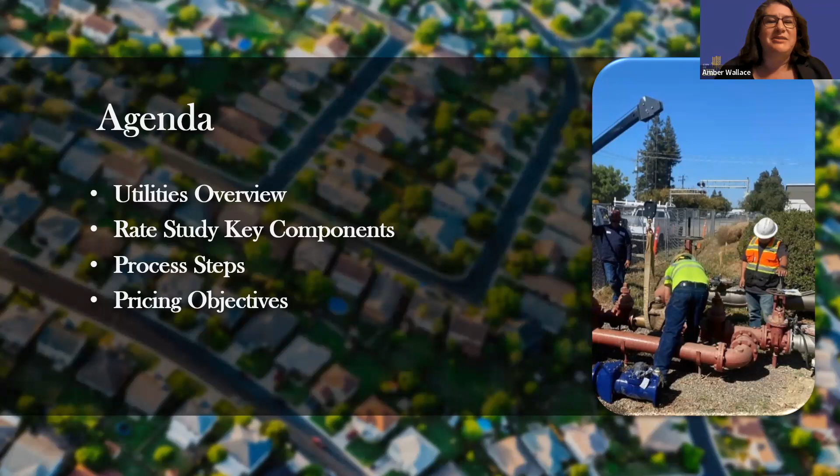So now for the main event, I'd like to introduce Amber Wallace, our senior civil engineer in the Capital Projects Department, to start off with some really interesting information related to infrastructure projects for the city's utilities. Thank you, Roberta. I'm Amber Wallace. I'm with the City of West Sacramento, and I'm a senior civil engineer. Can we change the slide, please?

So I'm going to talk about the city's water and sewer systems. Let's start with the good stuff, the city's water system overview. The George Kristoff Water Treatment Plant produces 11 million gallons of fresh water per day, and you can see that in the background of my slide. There's also 7 storage tanks in the distribution center, 2 clear wells, 8 booster pumps, 188 miles of water main line, and over 16,000 water meters.

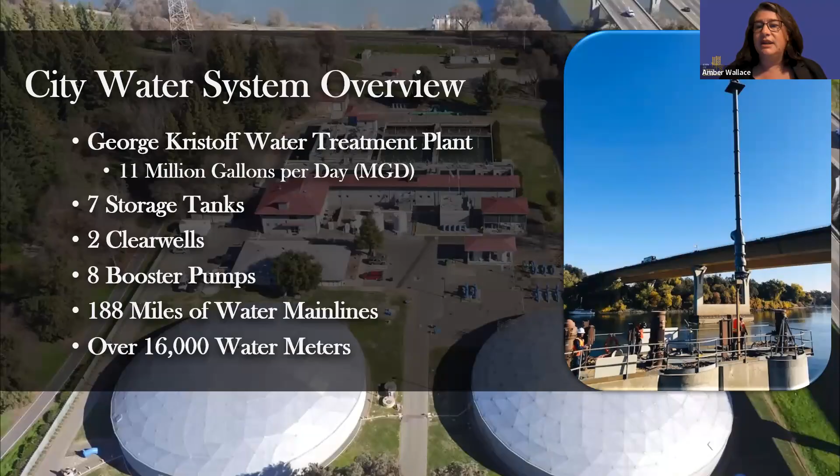Can we change the slide? Thank you. The city water has lots of challenges. One of the main challenges in the north area is aging infrastructure. I shared a picture of a giant geyser on this page, but usually when a water main breaks, it's not that big. It would just be a bubbling or a puddle on the ground. But this one happened on Southport with a large water main. There was a truck that actually hit a fire hydrant. So I thought that'd be fun to share.

Regulatory compliance updates for the state of California have shaped our challenges with the city water system. We needed to install water meters all over the city of West Sacramento. And now that we've installed them all, we now have to update them so that they're using the most latest and greatest technology.

And giving you the most accurate data on your water meter bill. Water rights and supplies is a really hot issue in California. There is not enough water and too many people who want it. So our staff have to work with regulators and with the surrounding agencies to make sure that the city of West Sacramento has the water supply and rights that we need now and into the future.

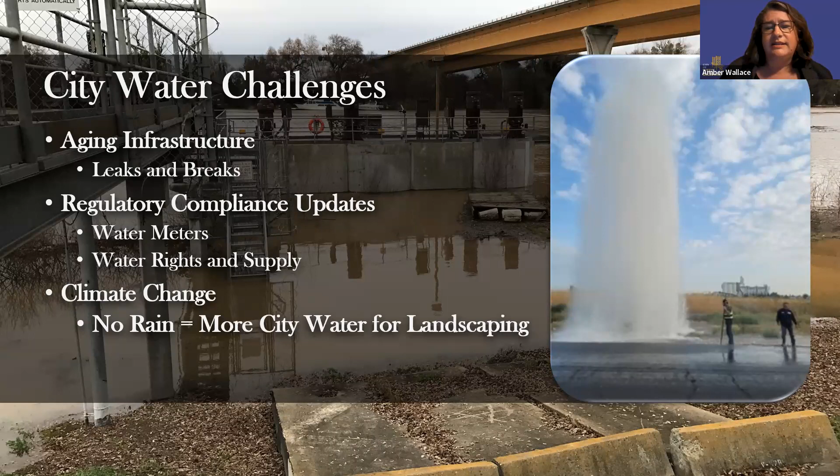Climate change also is causing troubles for our water system because when we have no rain or long periods of drought, there is more water needed for landscaping, and that causes issues as well.

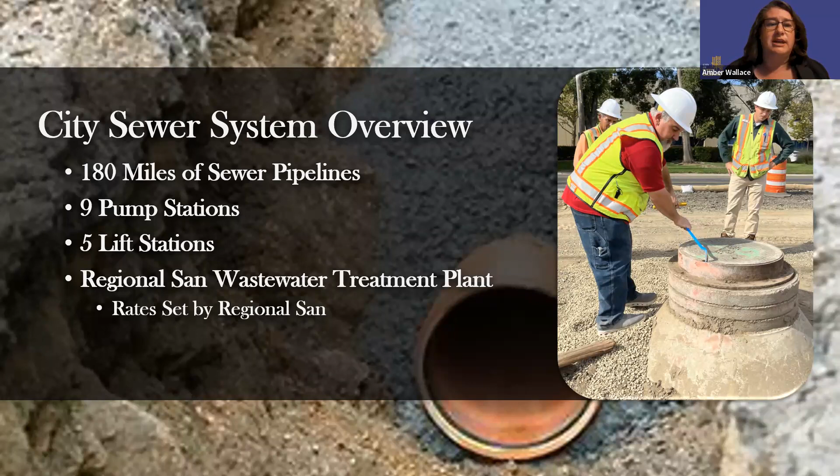For the city sewer system overview, we have 180 miles of sewer pipelines in the city, 9 pump stations, 5 lift stations, and all the sewage gets sent to Elk Grove to the Regional San Wastewater Treatment Plant. Regional San bills through our billing system, but they create their own rates, so that's a little bit different than what we're doing.

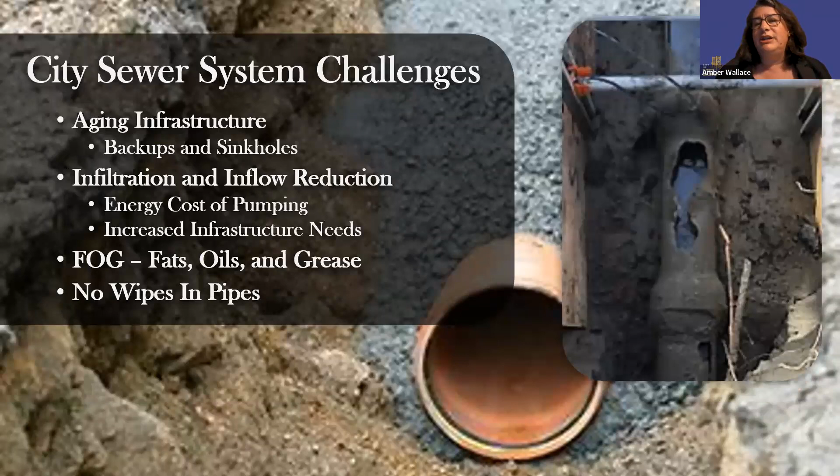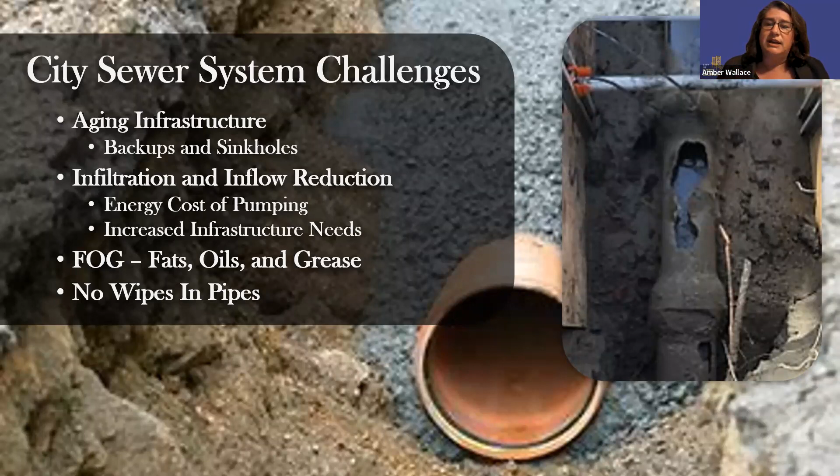So challenges by the sewer system are aging infrastructure, backups and sinkholes. Here's a picture of a pipe that has been corroded. A lot of times when a pipe is older, it will get old and corrode, and then water and soil will start seeping into our sewer system. That can cause the sewer to back up, and it can also cause a sinkhole.

All the fines come in and create a void underneath the ground. This one is like a small 1.5 foot void sinkhole we found in the State Streets neighborhood, and Public Works fixed that right away when we found it. But this is the kind of stuff that we're trying to avoid and look for before it happens and before it becomes an issue.

Infiltration and inflow reduction is another cause. It's when groundwater or rainwater gets into our sewer system, and it causes more pumping costs, more treatment costs, and particularly for the city of West Sacramento, the pumping cost is astronomical due to the energy rates. And then also it can cause increased infrastructure needs.

Particularly in the downstream portion of the sewer, like in the south area, we'll have so much flow going into pump stations that we'll think, do we need another pump station? Or should we fix all the pipes in the sewer service and try to find all these leaks and cracks? Because it can be very small, it doesn't have to be as big as I just showed you.

Another way that residents can help with maintaining the sewer and make sure that it's clean and clear, and that we're able to do our jobs as efficiently as possible, is to make sure you keep all fats, oils, and grease outside of your sinks. Those should be scraped and put in a can or in the garbage.

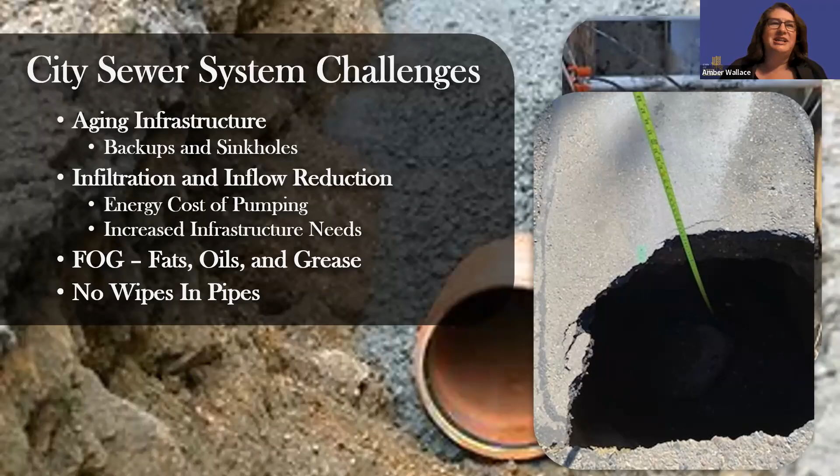Also, there's no wipes in pipes, which means those flushable wipes that we all have seen are not flushable. I don't know why they're called flushable, but that's a really big problem for us in the sewer industry. So don't flush any kind of wipes or anything rather than toilet paper.

So I have a list. I have a lot of pictures of completed infrastructure projects that we've done. And these were identified in the 2015 sewer and water master plans.

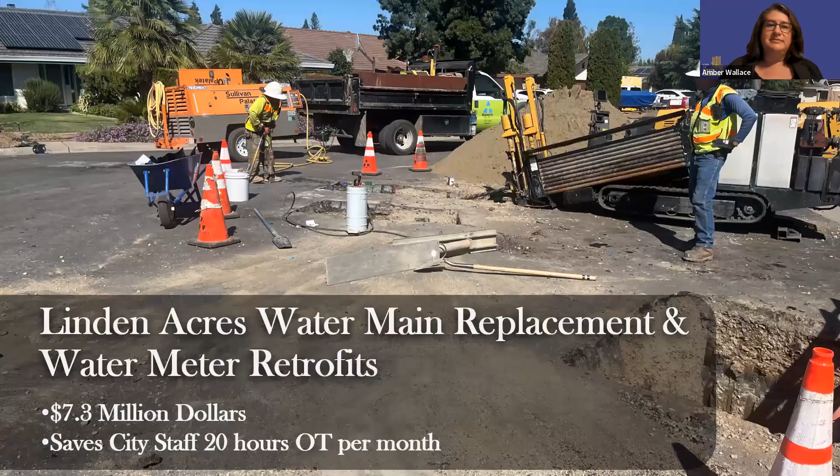Here's the first one that was just recently done. It's called Linden Acres Water Main Replacement and Water Meter Retrofits. In the Linden Acres neighborhood, they were having a lot of problems with water line breakage, and so our crews were out there all the time. This project that was recently completed has been saving the city staff 20 hours of overtime a month, which is very important to our small staff. The cost was $7.3 million, and that includes design, construction, and everything in between.

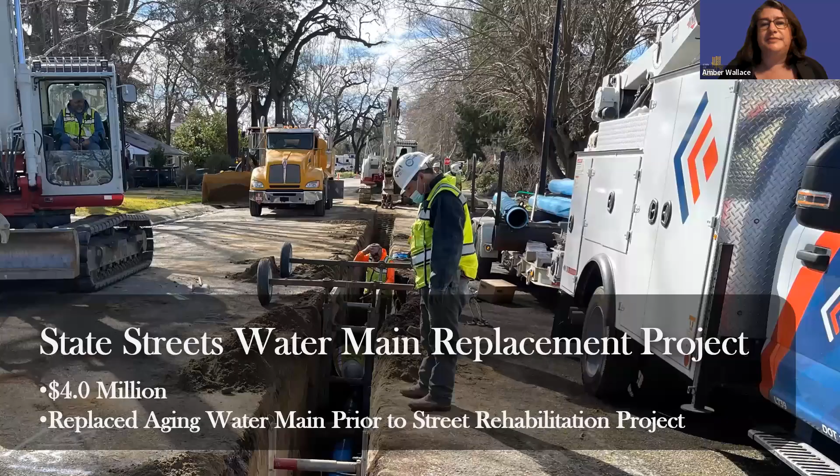Here's another recent project. It's the State Streets Water Main Replacement Project. This is a neighborhood where their infrastructure is at the end of its life. For $4 million, we replaced aging water main. We want to do that prior to doing the upcoming State Streets rehabilitation project for the pavement.

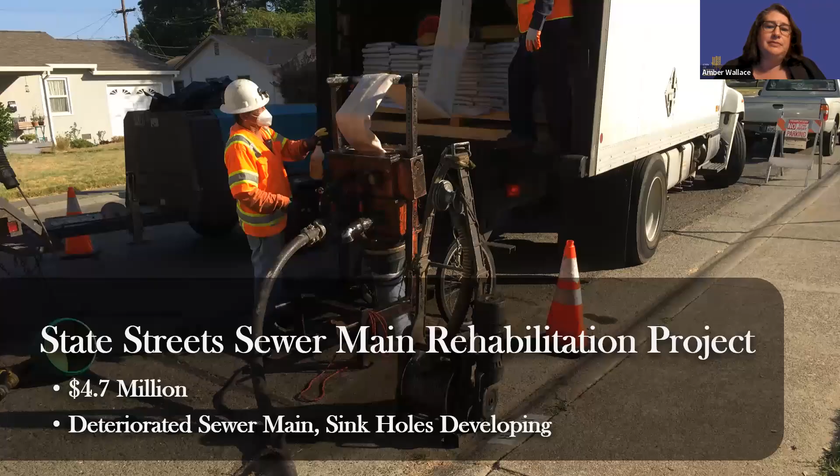We also did the sewer main rehabilitation project, at a cost of $4.7 million. We used a rehabilitation method called CIPP, cured in place pipe. You can see this cool picture of this felt liner being inserted into the sewer line. That felt liner is impregnated with resin and filled up with hot water or hot air and cured in place. It creates a structural pipe within the pipe, and it's a very inexpensive way to fill up all those holes, all the gaps, any kind of root intrusion, any kind of problems we've had with those sewers.

And we saw in our latest modeling effort that infiltration in this neighborhood has gone down significantly. So it was such a great story, a success story.

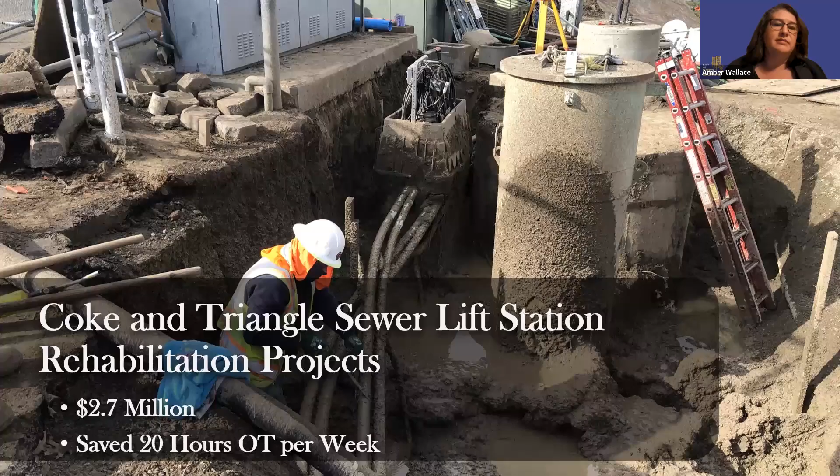Here's a project where we did Coke and Triangle sewer lift station rehabilitation projects. Remember, there are many lift stations and pump stations on both the sewer and water side, and a lot of them, especially in the north area, are pretty old. So we're going through doing rehabilitation. These two together cost about $2.7 million, and we saved 20 hours of overtime per week for our crews. So that's a success.

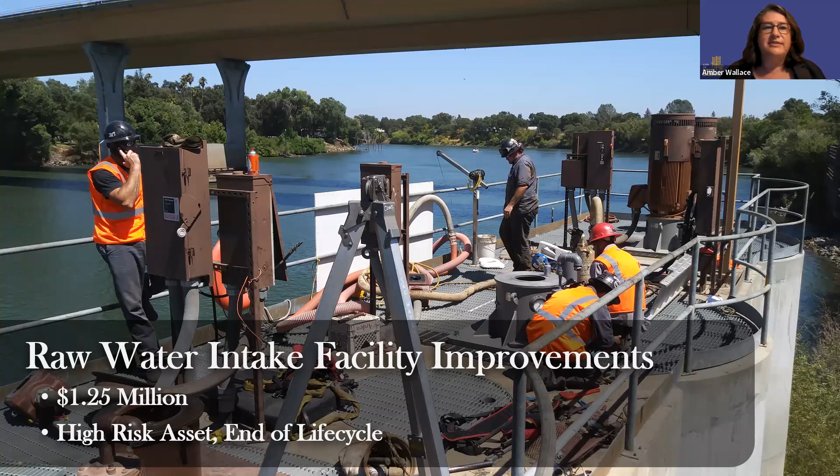Here's a project that happened at the George Christoph water treatment plant, a raw water intake facility improvement. It was $1.25 million, and this is a high-risk asset that was near the end of its life cycle. It's such an important asset that we have to make sure it's always working and never breaks down. So this was a very important project.

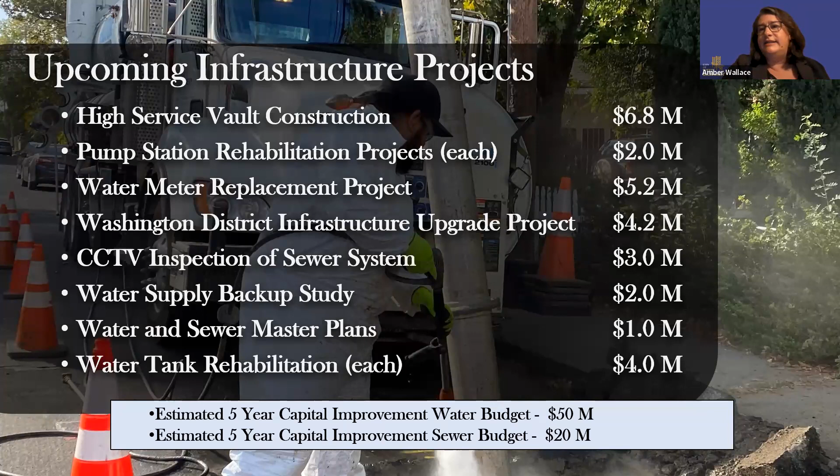The reason they're so different is the water budget includes the George Christoph water treatment plant, which is a very high-risk, very important asset. I'd say it's one of the most important assets in our city. So thank you so much.

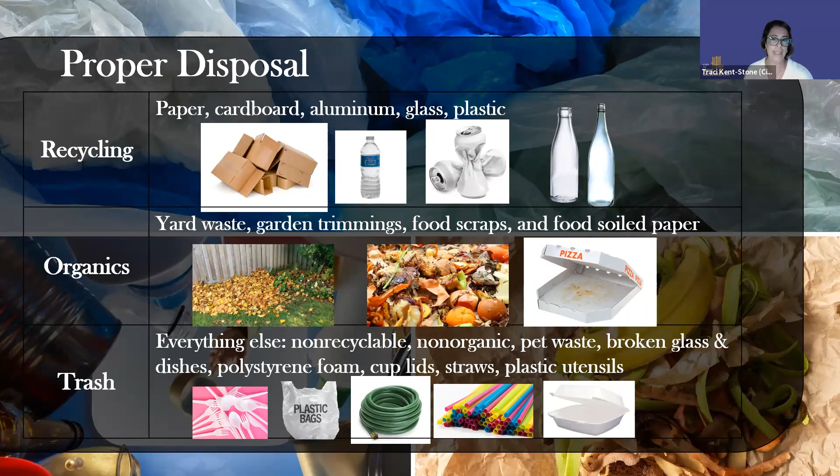If you have any questions about how to recycle, you can visit our website at westsacrecycles.org.

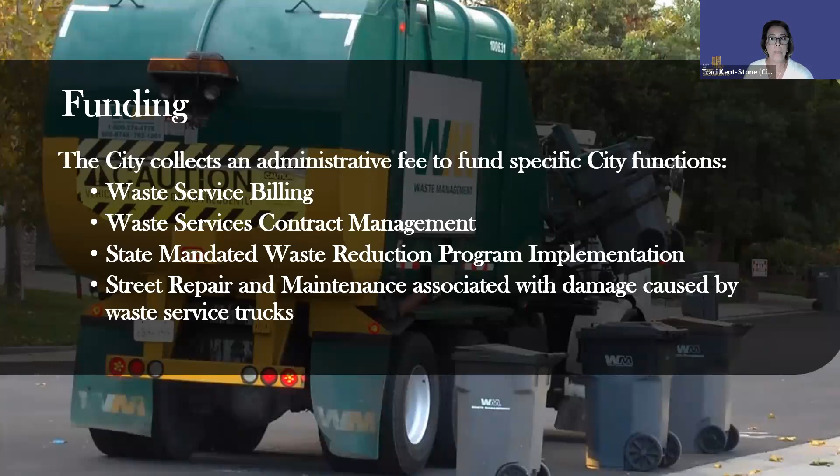In terms of funding, the city collects an administrative fee to fund city solid waste functions, such as utility billing, contract management, waste reduction programs mandated by the state—one example being SB 1383—and street repairs associated with damage caused by collection trucks.

SB 1383 was signed into law in 2016 with the goal of reducing greenhouse gas emissions caused by organic waste disposal in the landfill. It is a requirement for all residents and businesses with very few exceptions. SB 1383 mandates that jurisdictions provide organic waste collection and recycling service for all residents and businesses.

Again, organic waste includes yard waste, food waste, and food soiled paper. Jurisdictions are also required to ensure all bins are labeled with SB 1383 compliant labels to identify what goes in each cart. This is part of a comprehensive outreach requirement prescribed by SB 1383.

I bet you didn't know Californians send 11.2 billion pounds of food to landfills each year. SB 1383 requires jurisdictions in California to implement an edible food recovery program that will, one, feed hungry people, and two, reduce greenhouse gas emissions by keeping edible food out of the landfill.

Lastly, SB 1383 requires cities to purchase and use a specified quantity of recovered organic waste products to meet the law's annual procurement requirement.

SB 1383 has and will continue to change the landscape for the city's solid waste programs. For instance, the city is required by law to develop a compliance monitoring and enforcement program effective January 1 of 2024. This program will ensure all generators are compliant with SB 1383 provisions, and if they are not, enforcement action may occur. Additionally, SB 1383 requires all carts and bins to be color compliant by 2036 or sooner, depending on a jurisdiction's current supply of carts and bins.

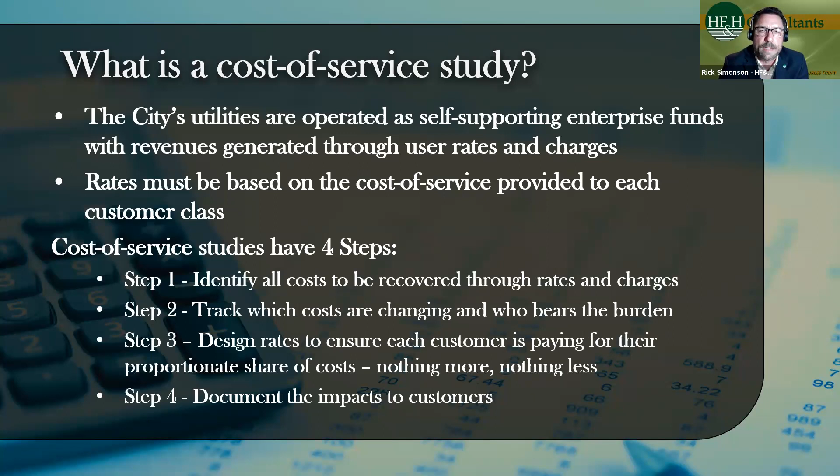Third, design the rates once we understand how much needs to come from residents and how much from businesses, to ensure each customer and customer class is paying for their proportionate share of costs, nothing more, nothing less. And lastly, documenting these impacts to customers: what are the expected increases over the next 5-year period for the average customer?

I'll start off with a brief overview of what we've done with the city over the last 6 months in the rate studies and where we are with refuse.

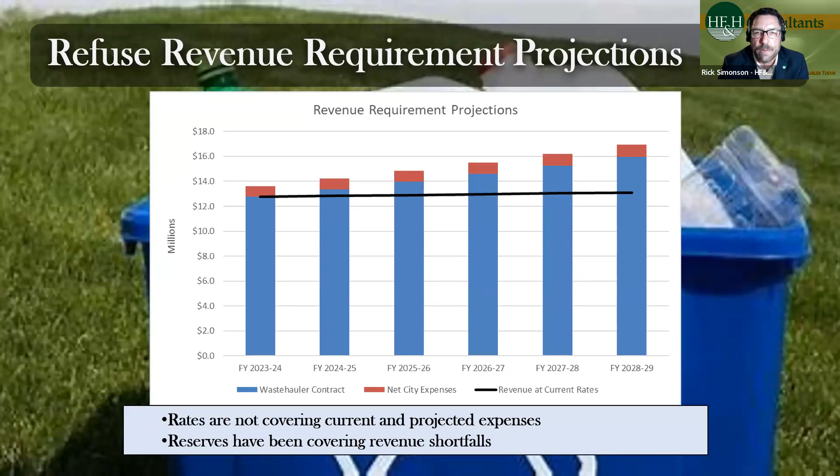A little more specifics about the key issues as we've moved through the process that will be affecting rates. We do know some sort of increase will be necessary over the next 5 years. Once again, we have not had an increase in refuse rates since July 1, 2021.

Though, as we all know, costs have been increasing. Consumer price index has been higher than pre-COVID days. So the current rates do not cover the current or projected expenses.

Waste management costs have increased 4% per year since July 1, 2021, and are projected to increase similarly over the next 5-year period. Another key factor is the disposal fees with the contract the city has with Yolo County Landfill. This past February, they increased 8.4%.

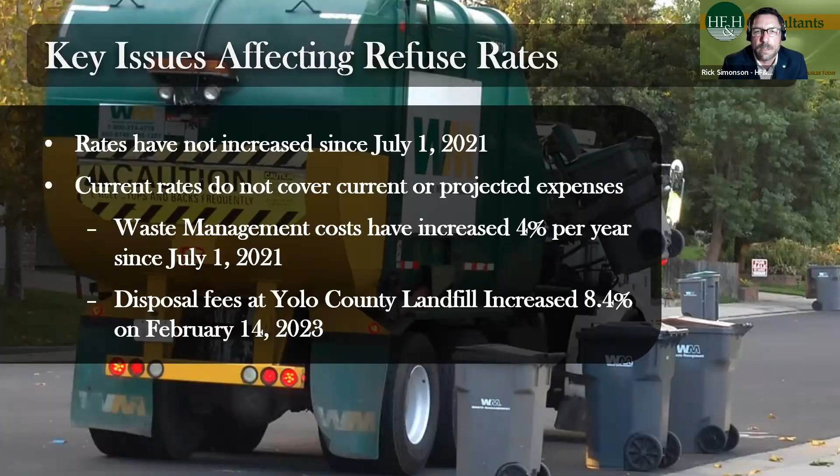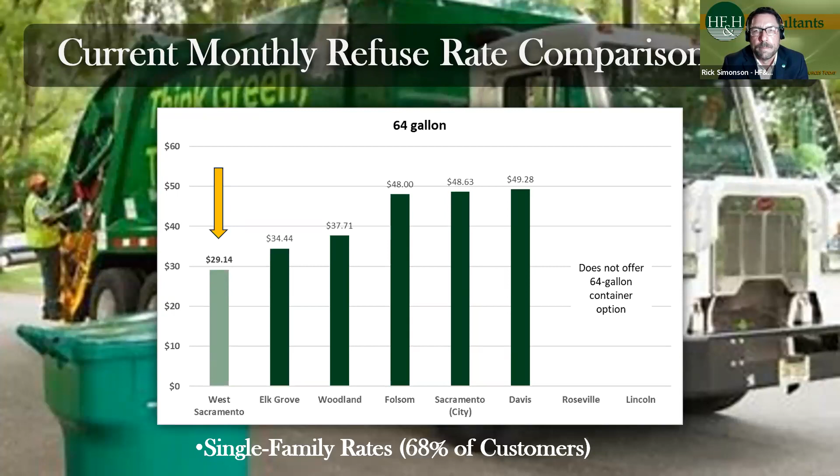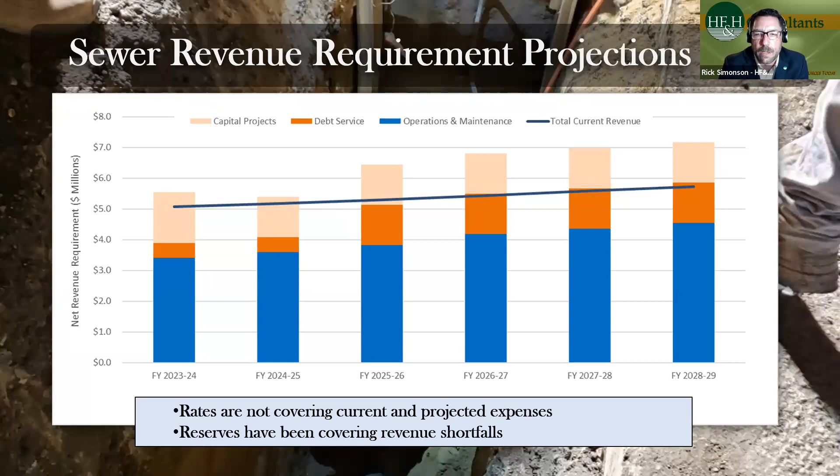Some key issues that are affecting the sewer rates as we've been working with the city on their financial plan over the next 5-year period. Again, the rates have not increased since July 1, 2021. And we know there's additional funding that will be needed for these major rehabilitation projects you've heard about tonight throughout the city.

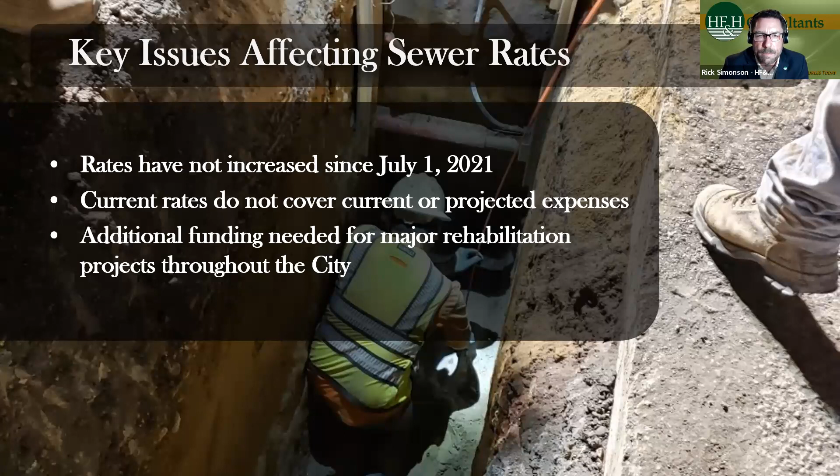A brief summary of the current rates. Residents, single family, are billed on a monthly basis a flat rate of $10.88. Multifamily per dwelling unit is $8.16. And the reason there's a differential there is through water use data. It's known that multifamily customers on a per dwelling unit basis use less water than the typical single family resident.

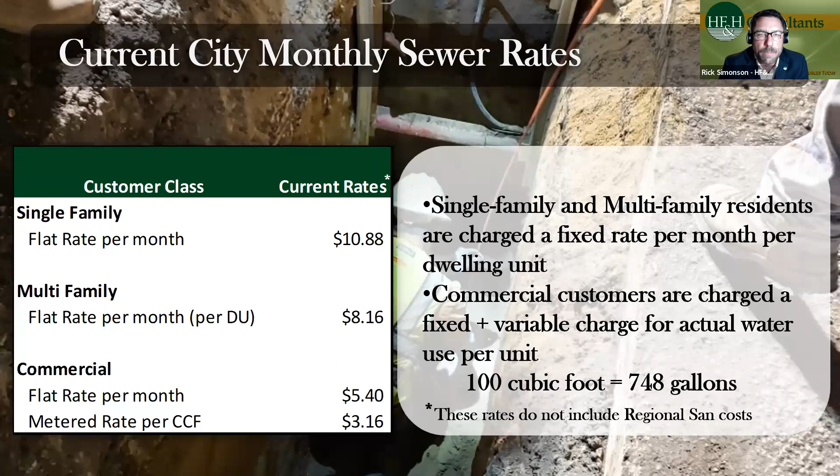Commercial customers have two components to their rates, a fixed component and a variable charge based on actual water use that's estimated to be discharged into the sewer system. I'll note these rates do not include the Regional San costs that the city does bill for, but the rates are set by Regional San.

So what are these rates currently for the city, including the Regional San costs? For West Sacramento, for the typical single family customer it's $47.88 per month. Again, this does include the Regional San charge that is billed by the city but remitted to Regional San. And the reason we've done that is the neighboring jurisdictions that we're comparing to. We wanted to make sure it was an apples to apples comparison that includes both collection costs that the city provides to the residents, as well as treatment of the sewer that Regional San provides to the residents.

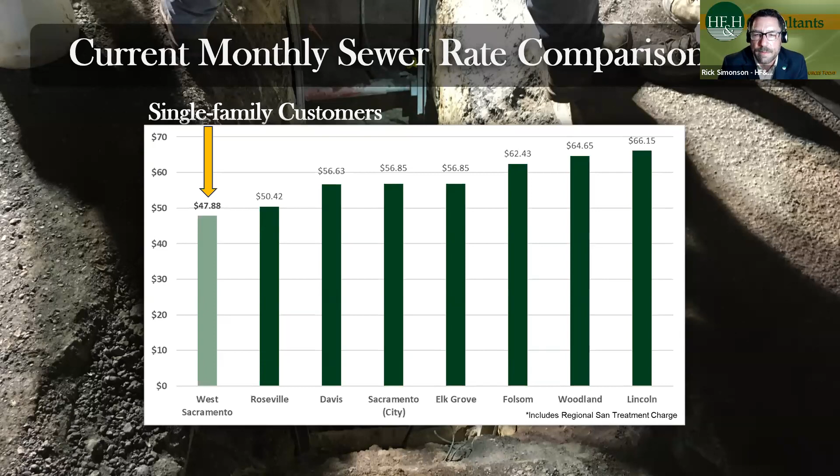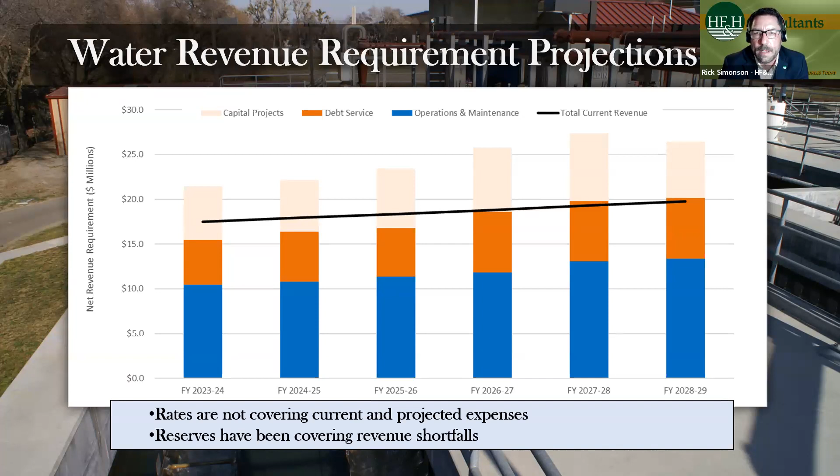So as we've gone through this process, we know some sort of rate increase will be necessary. How those will translate to new rates, we're still working with the city.

Again, rates have not increased also for the water utility since July 1, 2021. And as shown on the previous slide, current rates do not cover current or projected expenses. Many upgrades are happening throughout the city as previously discussed, one of which is water meter upgrades. This will allow all customers to track their water use and identify leaks quickly.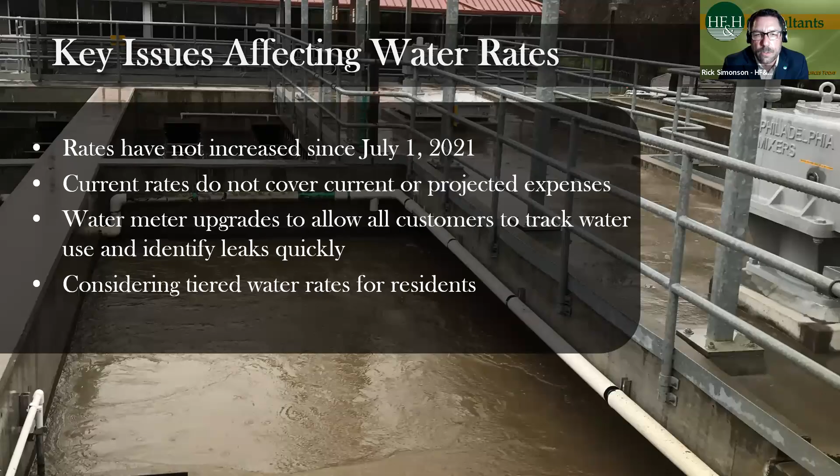Also, the city is contemplating tiered water rates. Currently, there's a uniform rate per unit of water used. And that's depicted here. The water bills are made up of two components. There's a fixed charge for all customers plus a consumption charge based on the metered water use.

On the left-hand side, you see the monthly rates based on the meter that is providing service to that property. Of note, most single-family residences have a 3/4 inch meter and are currently charged $24.61 per month. In addition, based on how much water is used at each individual customer location, there's an additional charge of $2.43 per 100 cubic foot of metered water use during that billing period. 100 cubic feet of water is equal to 748 gallons, to give you some idea of how much water that is.

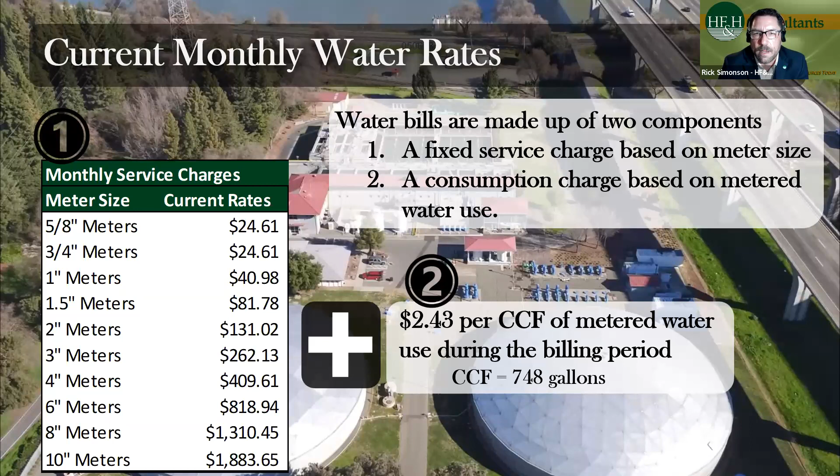Again, where do you currently compare to your neighboring agencies? About right in the middle currently with your current water rates. Folsom on the low end of $36.70 and as high as $101.96 in Woodland. And I'll point out this because everybody uses water differently during the year, your bills do change. This comparison is looking at the average water use, which is 1,100 cubic feet per month, and that's an average about 274 gallons per day.

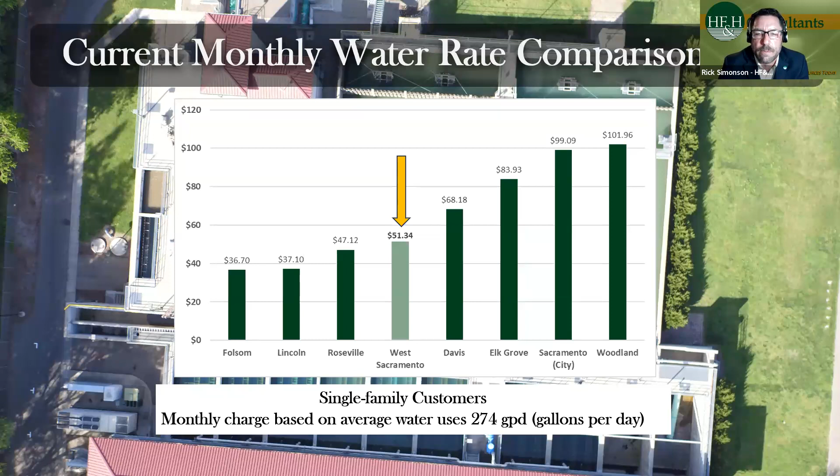With that, I'll introduce Ryan Burnett, the city's water conservation coordinator, who will give you some tips and tricks on helpful ways of saving water to reduce those water bills.

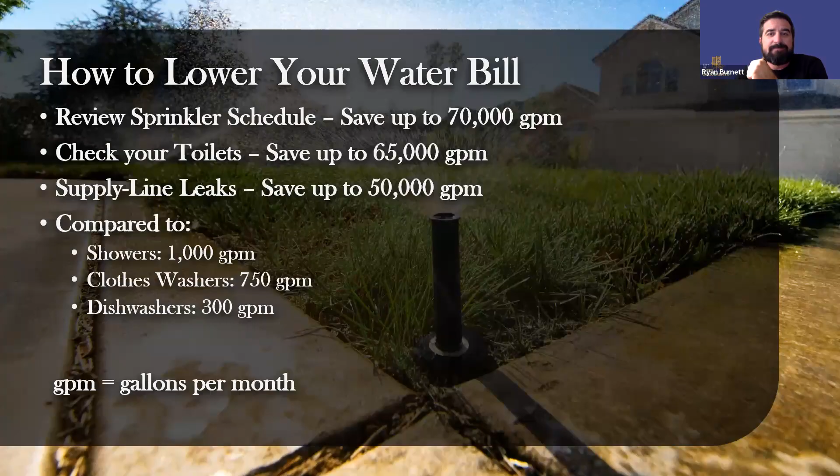So the good news is that the city offers a free water portal. This water portal is an online site you can use to check on your water use and sign up for leak alerts. So if you do have a leak, you'll be notified right away.

So let me end with a few resources available to you as a resident to help you keep your water bill low. The first is our smart controller rebate. This rebate offers up to $150 to purchase and install a sprinkler timer that will do the scheduling for you. This will help keep your landscape green without a huge water bill in summer months. Many timers cost around $150, so the whole process can be free or nearly free for the homeowner.

The city recently launched a new program called Lawn Be Gone. We are offering up to $300 towards the purchase of compost and mulch to cover and kill your lawn. This program has a lot of steps to it, but the basics are...

You would apply to the program, take a picture of your current lawn, and then receive notification from the city to cover the lawn with cardboard or weed barrier. Once you're done, you reach back out to us, and we contact our vendor who sets up a delivery of compost and mulch right to your door. You put the compost on the barrier and the mulch on top, and that will kill the grass.

The third resource available to you is the water portal, which I mentioned before. This resource can give you a lot of peace of mind as a homeowner, if you're on vacation, away from the house for a while, or if you have a supply leak you can't see evidence of—you'll get notified right away.

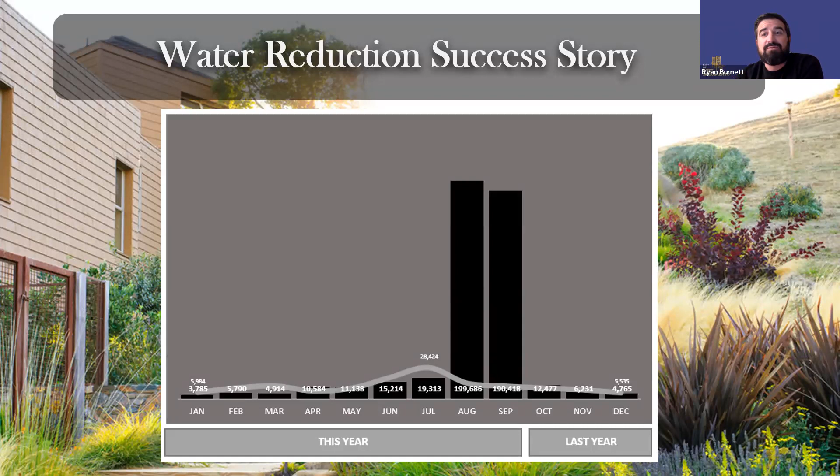The next steps in the process include an open house next week on Thursday, October 19th, at Club West on the north side of town. And the following week, Wednesday, October 25th, at the Recreation Center on the south side of town. We'll have subject matter experts available at those events to provide additional information and answer any questions you might have—there won't be a formal presentation like there is today.